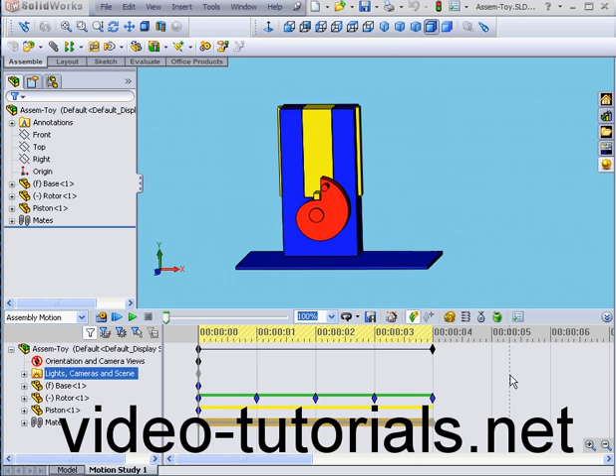Welcome to our tutorial on using angular mates. We're going to pick up where we left off in our previous tutorial with the toy. In this tutorial, I'm going to use angular mates instead of distance mates to rotate the rotor.

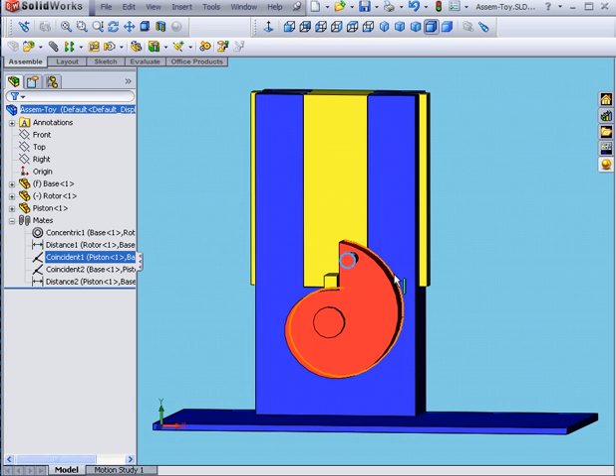Let's exit Motion Study. Go back to our model. Currently, I have two mates for this rotor, coincident and distance. The distance mate is simply an offset between the rotor and this face. I'm going to click Mate. Let's right-click and clear selections.

I'm going to create this mate in a way so that the initial rotor position is 0 degrees. And then it'll move to 90, 180, 270, and 360. It's easy to do this way, and it's less confusing for SolidWorks too.

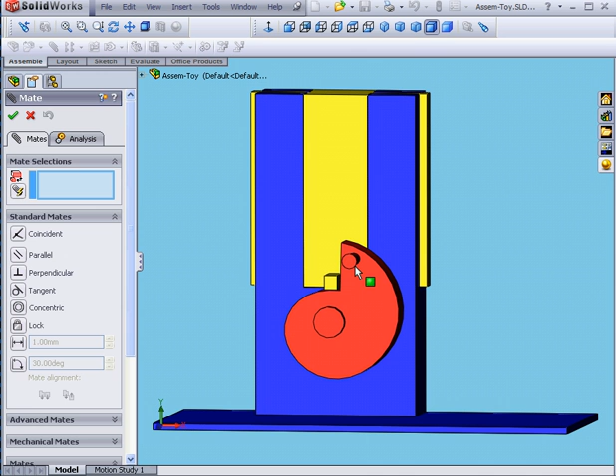I'm going to select this face, and then this face. Now we select Angle Mate, enter the value at 0 degrees, Tab, OK. Next, I need to check the angle calculation clockwise. Basically, I increase the angle value, and the rotor moves in a clockwise direction. If that's not the case, simply check Flip Dimension.

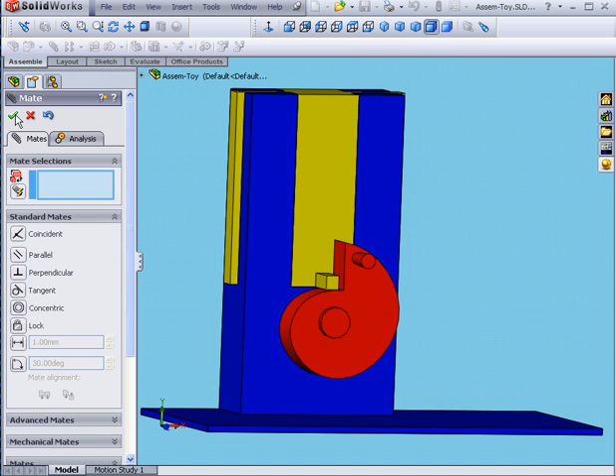Let's go back and enter a value of 0, Tab. At this point, I'm ready to click OK, and OK. Let's return to the Motion Study tab. SolidWorks asks me if I want to update the time 0 keys back to valid positions. Let's click Yes. Previously, the key was red. Now it's blue.

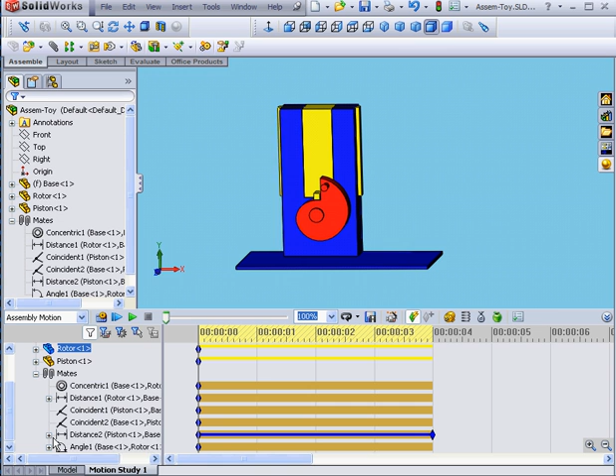Let's highlight our key points and delete them. Next, expand the Mates branch. Here's my angular mate. Let's bring the time bar to the 1 second mark. Double-click on our angular mate. Let's move the slider to 90 degrees. OK.

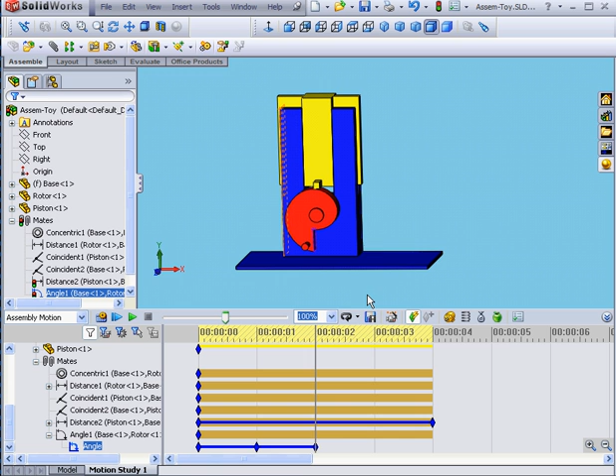Let's drag our time bar to the 2 second mark. Double-click on our angular mate. Move the slider to 180. OK. Now let's move the time bar to second 3. Double-click on our angular mate. Slide up to 270 and click OK.

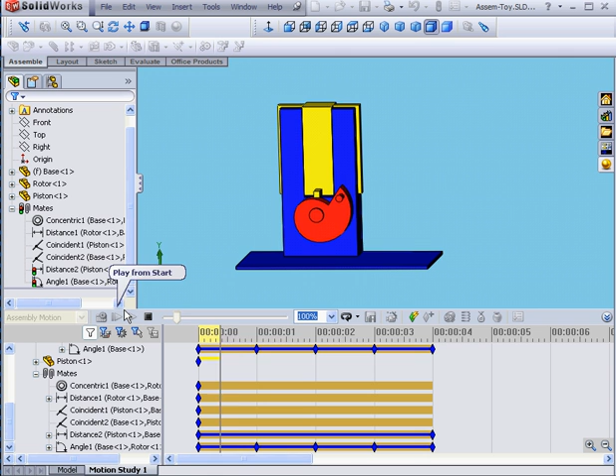Our last move is at the 4 second mark. We double-click and move the slider to 360. Let's click OK. Now let's calculate. Here is our preview. Everything seems fine. Let's press Stop.

In a situation like this, it's important to watch for this particular problem. Let me double-click. 360, as you see, is actually equal to 0 degrees. But if I put in 0 and click OK, let's recalculate to see what happens. Let's press Stop. You can see that the rotor doesn't move consistently in one direction.

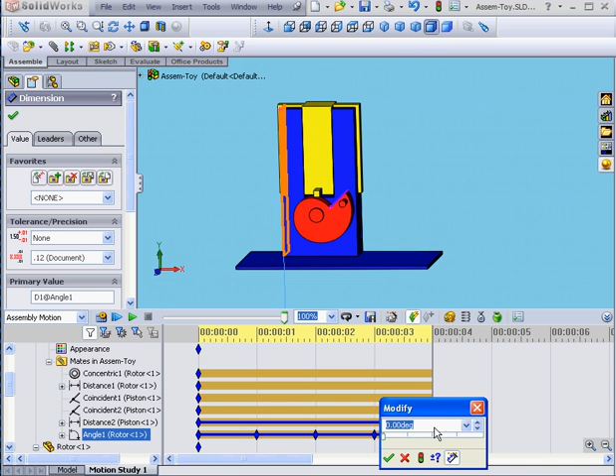Let's return the value to 360 degrees. Double-click. Move our slider up to 360 and click OK. Now let's run our calculation. Each time you make changes, you need to make sure you run the calculation. Now everything appears to run fine. Let's click Stop.

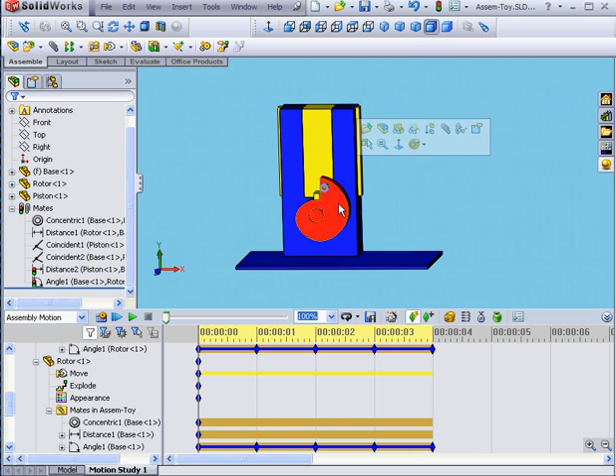For the initial position, if I'd used this face, for example, it would have made the initial angle 90 degrees. I'd need to have calculated starting from 90 degrees, then 180 here, 270 here, 360 here, and back to 90.

Unfortunately, this probably would have confused SolidWorks, and we would have ended up with some similar inconsistency in our animation that we just saw when I changed the value from 360 to 0 degrees. You need to watch for these types of issues when using angular mates.

In a situation like this, I could have simply used 2 key points at 0 and then 360 degrees and no intermediate points at all, but they are useful, for example, if I want the rotor to move at, let's say, different speeds.

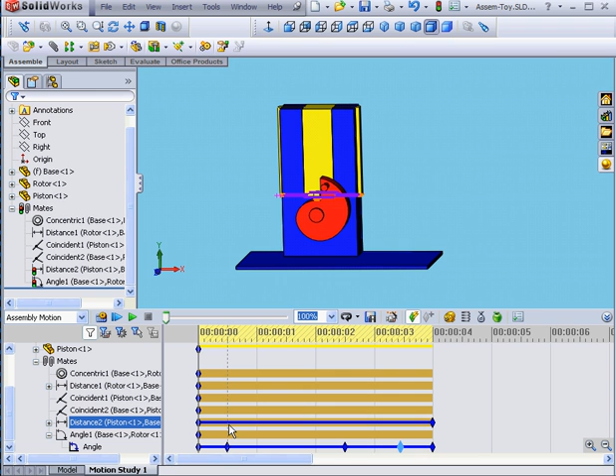Of course, in order to match the piston movements, I need extra key points in the distance mate's change bar. I'm going to skip this for now and click Calculate. You see now that the rotor moves slowly, and then it speeds up. However, the movement of the piston doesn't match the movement of the rotor right now.

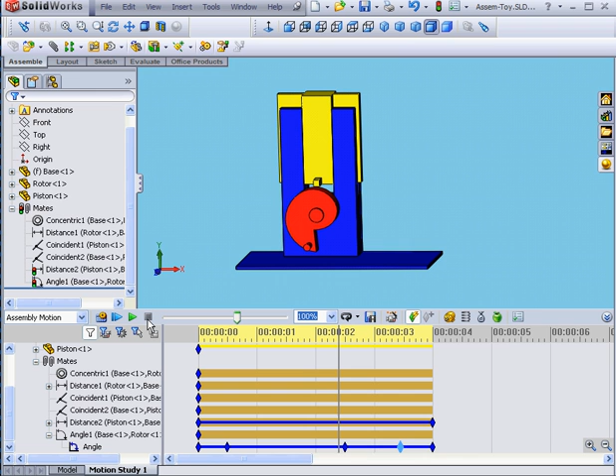Let's click Stop, and this concludes our tutorial on using angular mates.